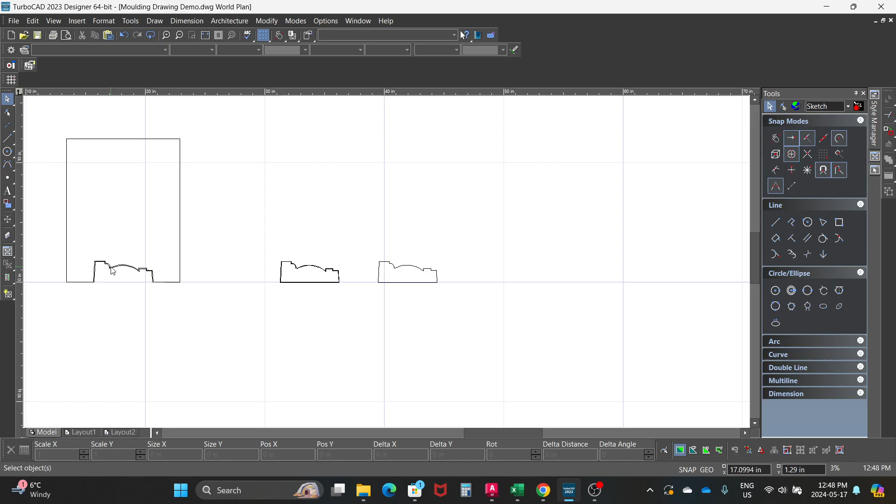So if you had gone through the steps to draw out a profile you'd like to cut out, starting with the template, offsetting it 1/16 of an inch, and then offsetting it again 0.03 on the outside to take into account for the foam burn, you have a piece here that you'd like to cut out.

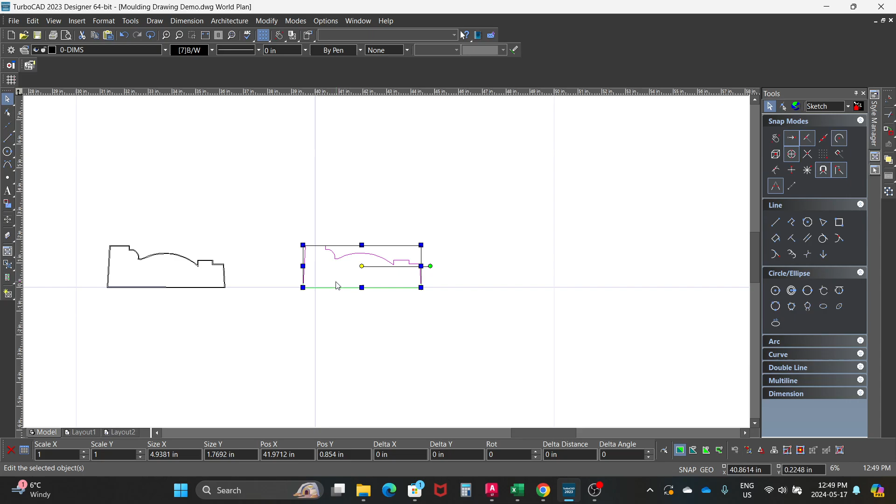I'll go over quickly how I would draw this and nest it together to make a row of foam to cut out. So basically, I would start with this and copy it over.

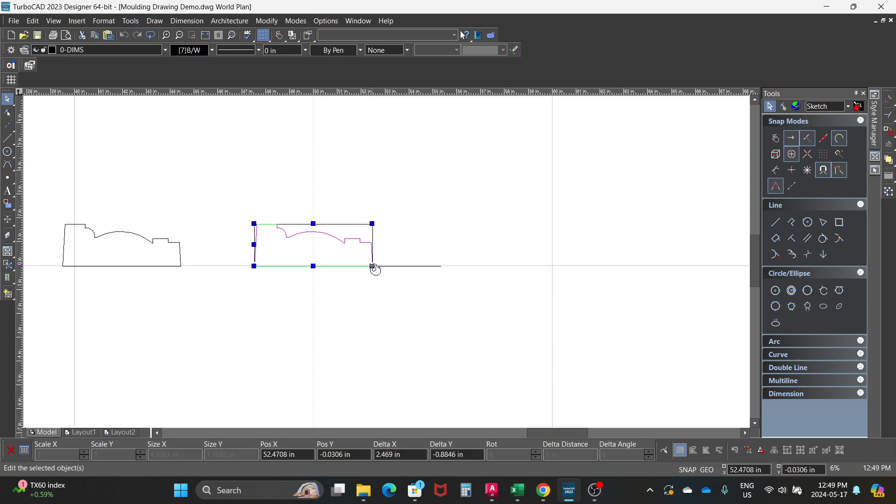I would right mouse click when I have the object selected, edit reference point, that lower right hand corner there, click on the green node, and scroll over the point, the reference point, to get the construction lines. Perfect.

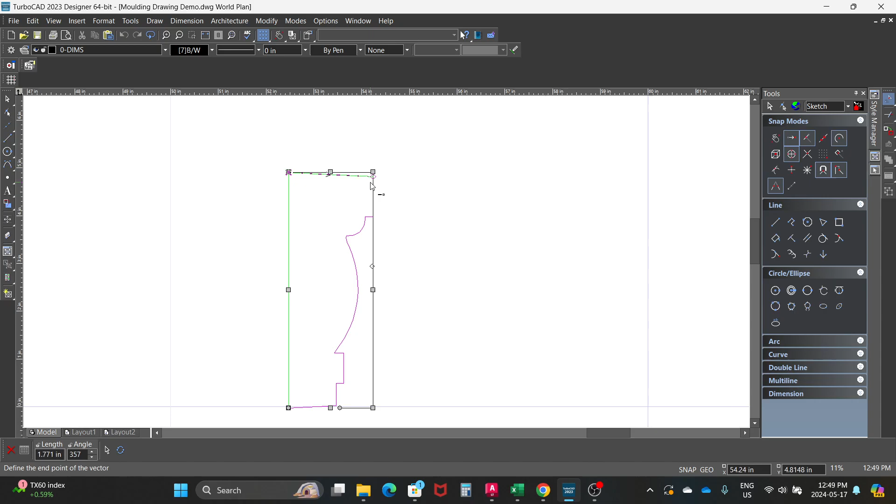I'd probably nest this shape together by making another copy here, and I'll rotate this 180 degrees. With this shape, you probably won't save a whole lot of material by nesting them together, but sometimes the difference is significant.

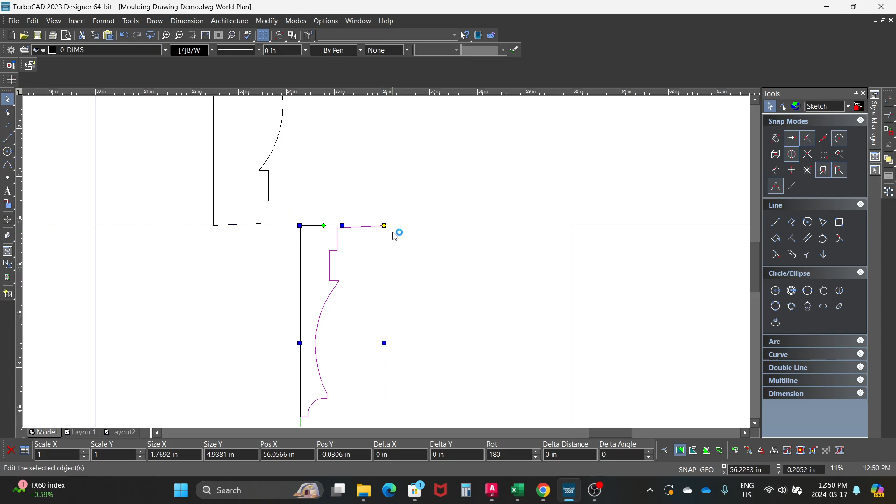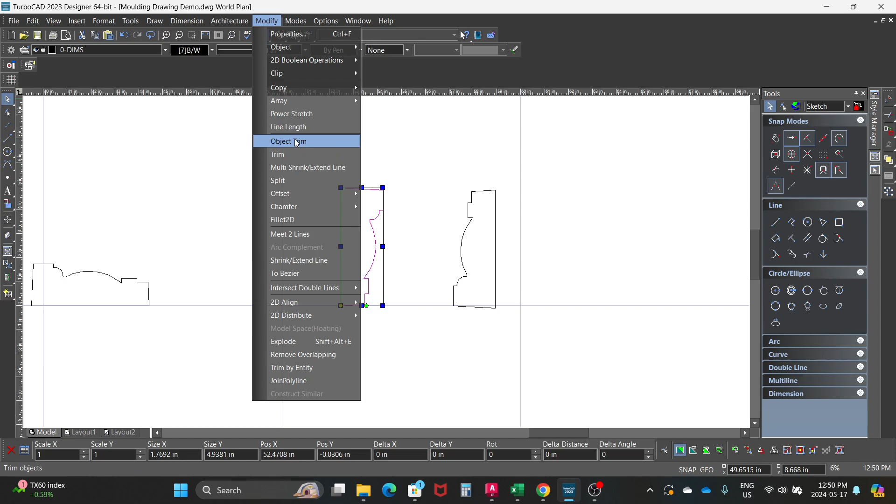One trick I've been using lately is I'll add an offset of 0.2, or whatever space I'd like to keep the profiles apart, and offset it that distance.

Let's offset. I'm going to tab into the corner here. Let's just say I want to keep these profiles 0.15 inches apart. I'm going to select that object, then select the side I'd like to offset it on, and then I can drag.

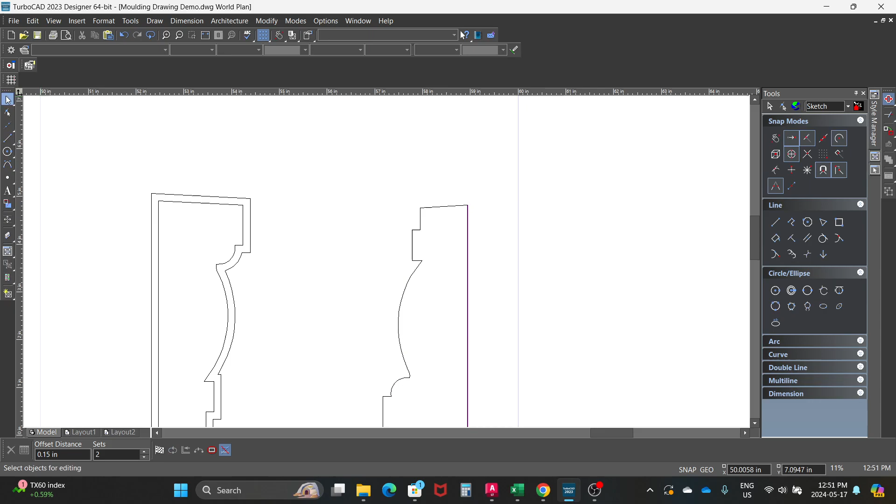Then I'll select this profile and drag it in here close to that line that I just drew. Just kind of touch it, and then I know that these are spaced out enough.

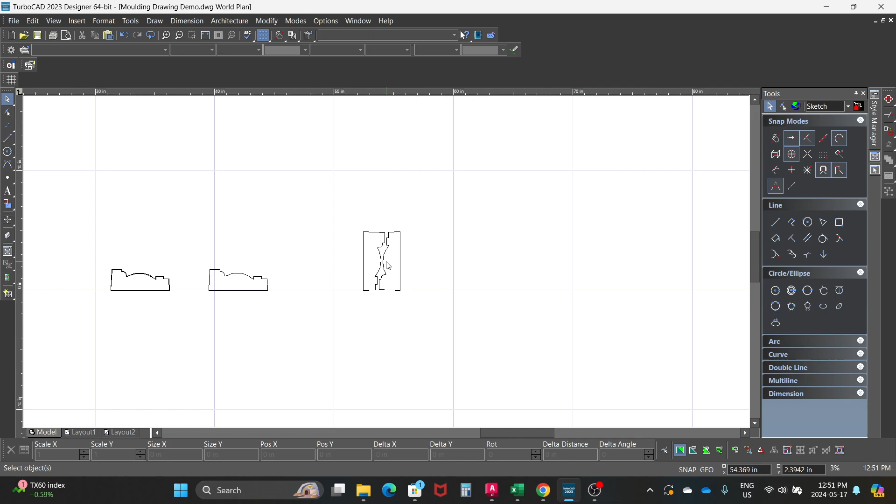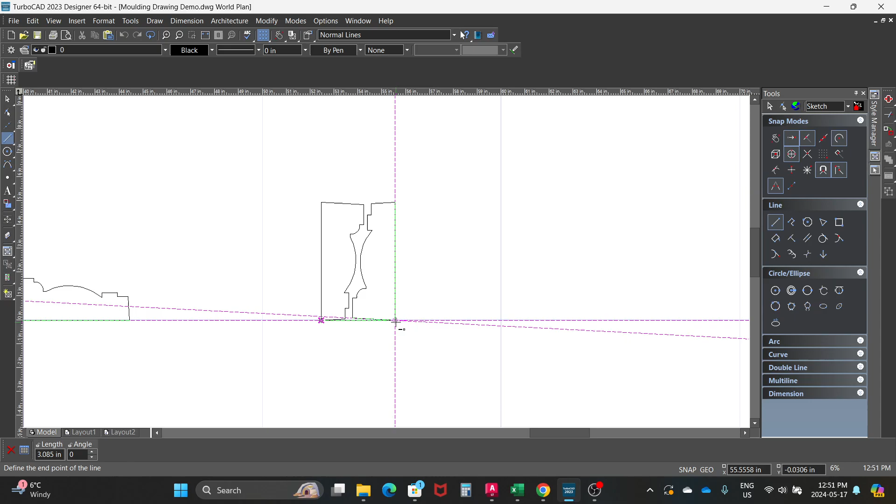So then what I'll do is make a whole row of pieces to cut out in the block of foam. I'm going to draw a line on here just to make a measurement. So these are basically 3 inches, and my block of foam is... I draw a line on here, and those are 3 inches.

So I'm going to add - oh, here we go, this is the best way to do this. So these are 3.08 inches. Let's get out my calculator here.

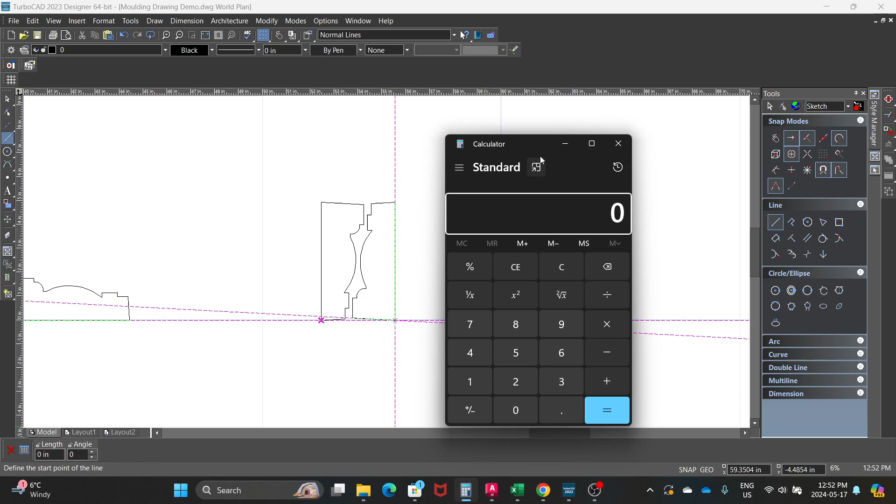So I'm going to go 3.08 inches plus 0.15 - that's going to be that group of shapes there plus my spacing of 0.15 inches. So I'll just have to remember that: 3.23.

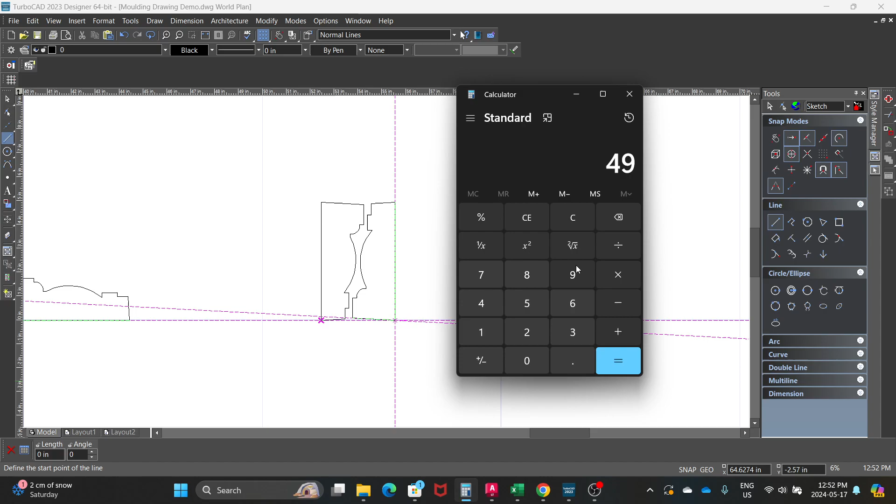My block of foam is 48 and a bit, so I'm going to go 49 divided by 3.23. So I can get about 15 or so of these shapes into a block of foam.

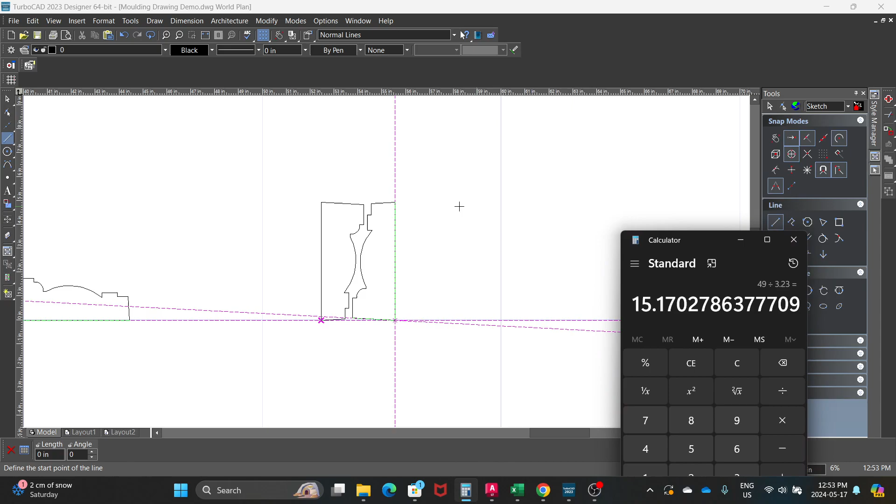I'm going to use the array tool to draw out a row. I'll left mouse click and draw a window over both of these profiles, right mouse click, edit the reference point, then go modify, array copy, linear.

If I tab into the lower corner there, it asks me the spacing between the objects, so I'm going to go 3.23 - that was the two shapes plus a little bit of space, 0.15 inches in between the shapes.

Tab over to the Y, and that's 0 because they're just going to go in a straight line on the x-axis, and the y-axis would be up, so we're not going to go up. Then we tab over again to the sets, and it's asking us how many sets we could get, and I closed the calculator.

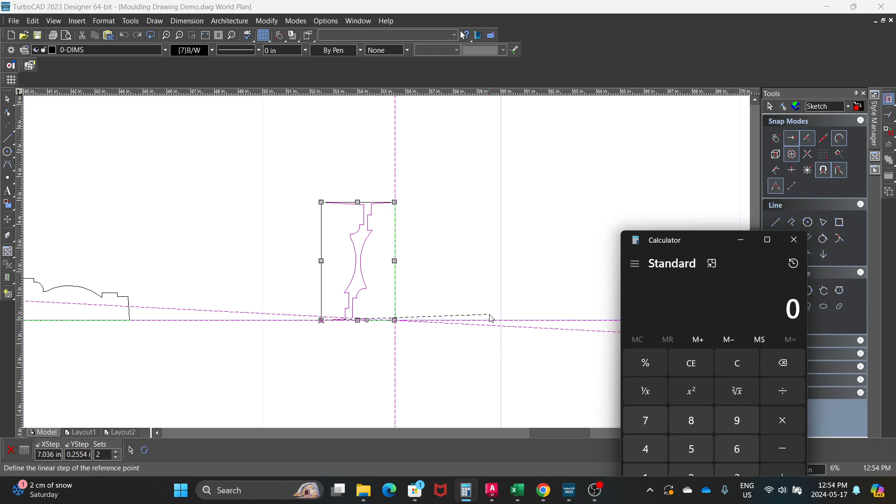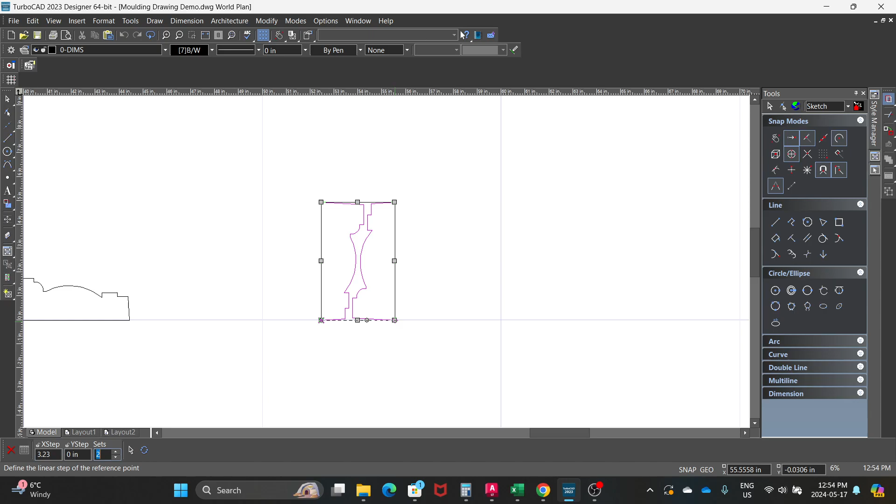I believe it was - let's just do it again really quickly - 49 divided by 3.23 would be, yep, 15 sets. I'm going to tab over to this and go 3.23 again, 0, and we're going to go 15 sets, and then hit enter, and it draws out and copies them for you perfectly.

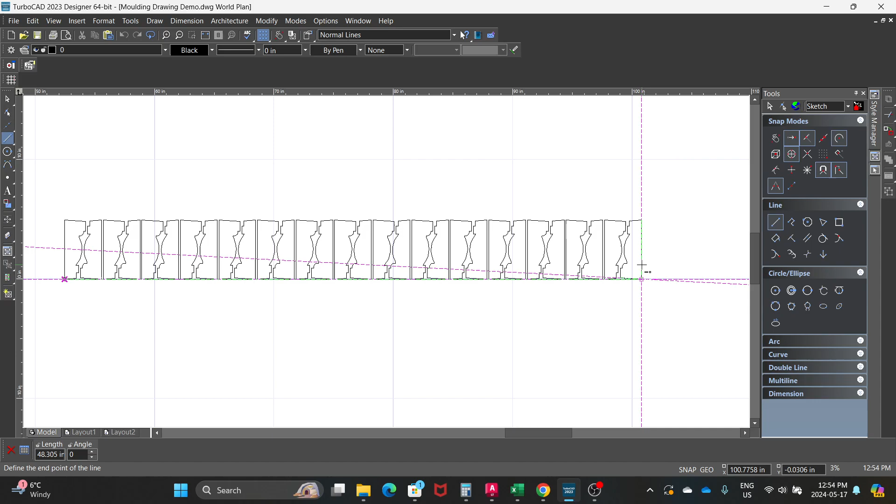You could draw a line on this, check to make sure it's the right length there - 48.3, so that's great, that'll fit into my block of foam. Sometimes I like to add extra shapes onto this and then just delete them if it's not going to fit.

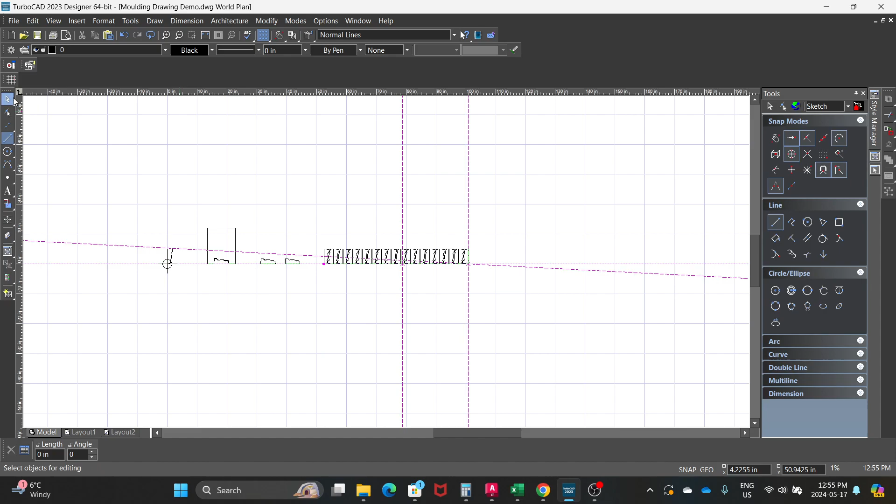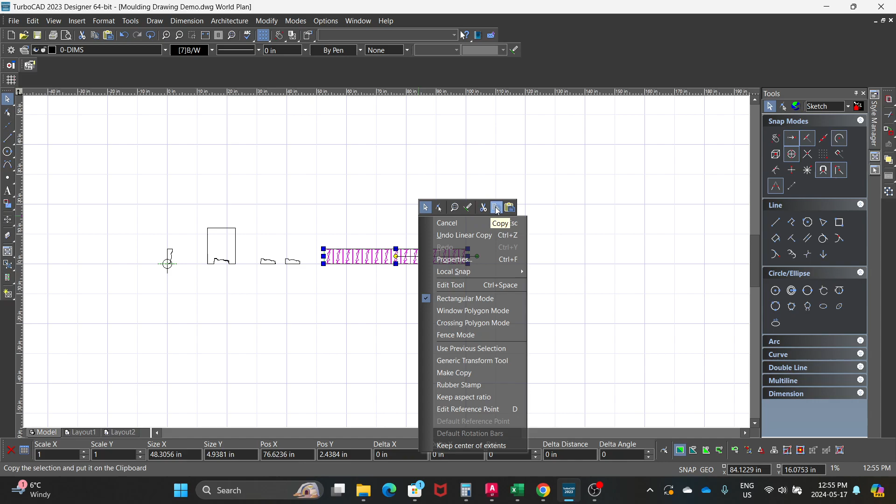Once I have this row ready to cut out, what I'll do is select it all, right mouse click - let's try that again - select it all, right mouse click, and at the top here you can see there's a copy and paste command. So I'm going to copy, go new drawing from scratch.

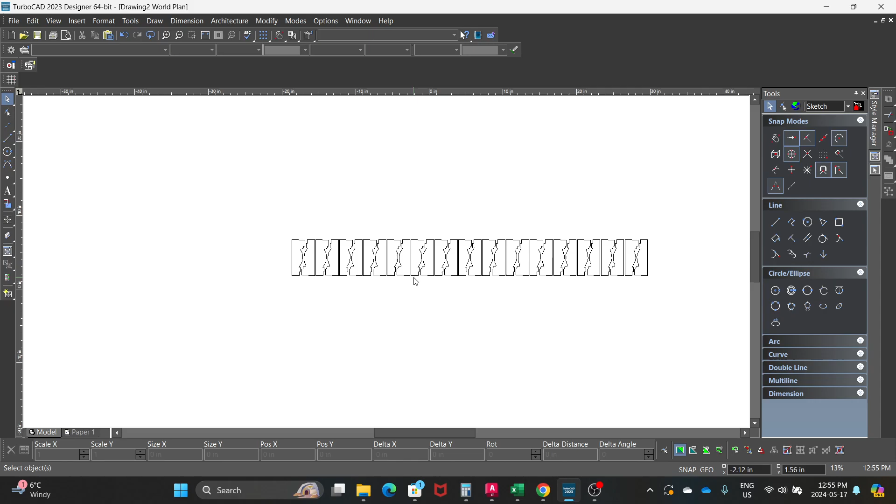You could use Control C and Control V, but I'm just going to do this - I'm going to paste it. Now we have that row of foam pieces to get cut out in a new drawing here.

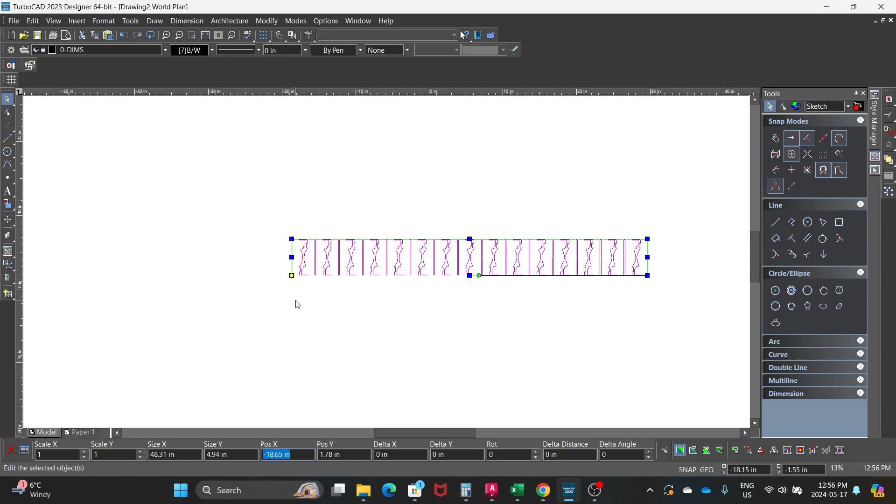I'm going to select all these, right click, edit reference point on the lower left there. Now I can tab into my properties below here, and move this to x0.3, y0.

If I turn on the grid here, I can see we're right on the 0 for the y, and right on the 0.3 for the x. That's good - you want to cut your rows of foam on the 0 for the y-axis, because you want to start in the lower left-hand corner of a row of foam, and 0.3 on the x-axis gives you a little bit of space between the edge of the block and the foam.

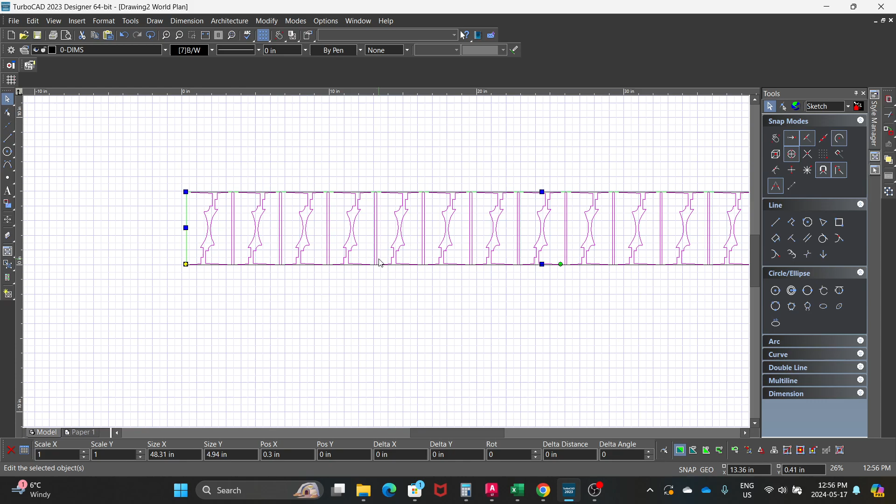So basically you can take this file now and load it into your CAM program to show the wire how to go through it to cut foam.

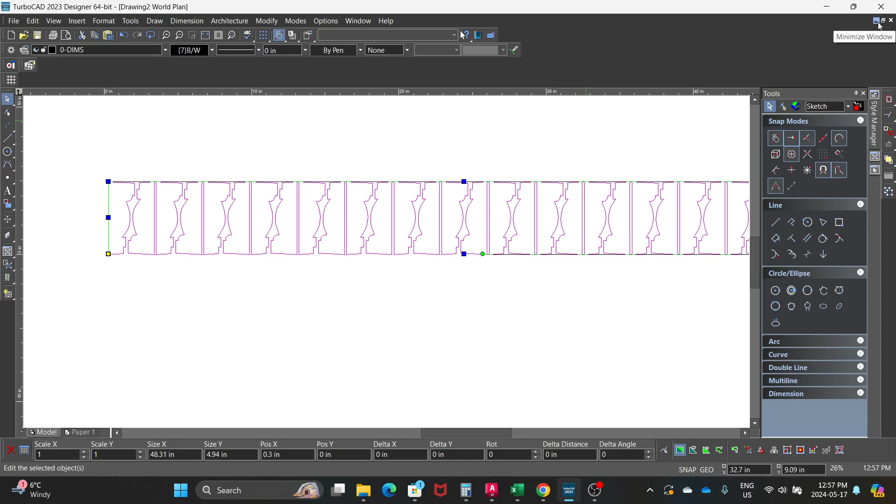Once you have the CAM program show the wire how to go through, you could cut out these pieces, and it would fit into your template here. Also, each drawing has these window tools, so you could minimize it, make it large, and work with multiple drawings inside the program here.